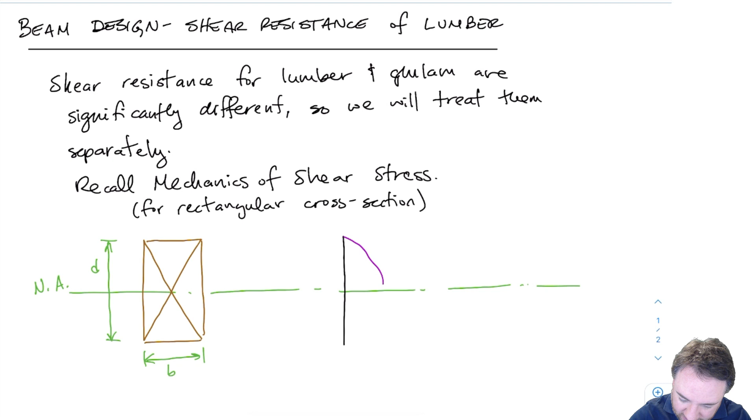Before we go into the standard design equations, let's recall what exactly is happening when we look at shear stress in a beam, and we want to limit the shear stress to be less than the limiting shear stress. If we have a rectangular beam like the one shown here, the shear stress distribution in a rectangular beam should be parabolic.

If I want to find out what this FV is, the shear stress, you'll recall the equation for FV from a previous mechanics course: VQ divided by IB, where V is the shear force at that section, I is the second moment of area or moment of inertia, B is the base or width of the cross-section, and Q is the first moment of area, which looks something like this.

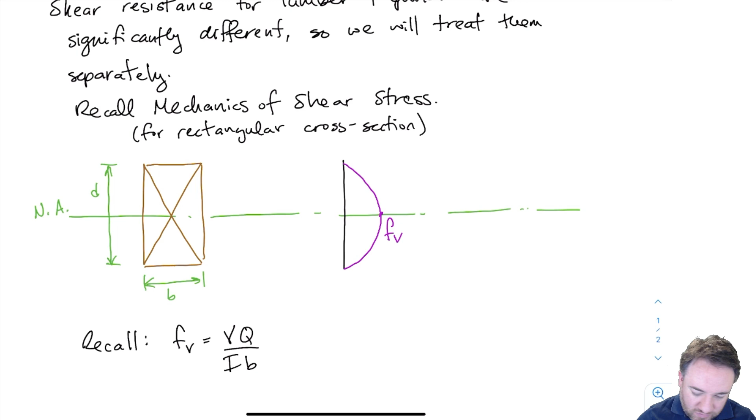Recall the first moment of area: this is how we calculate it at the center of the section. Q changes depending on which part of the cross-section we are with respect to height. We take the area to one side of the neutral axis and multiply it by a lever arm, the distance from the neutral axis to the center of that area.

If I'm looking at the center of the beam, where FV max is, I take the area of the top half of the beam and multiply it by the distance d over 4, the distance between the neutral axis and the centroid. So to calculate Q at the center, A prime, the area, times d over 4. A is B times d over 2, and d over 4 here. So what we get is BD squared over 8 for the center of the section.

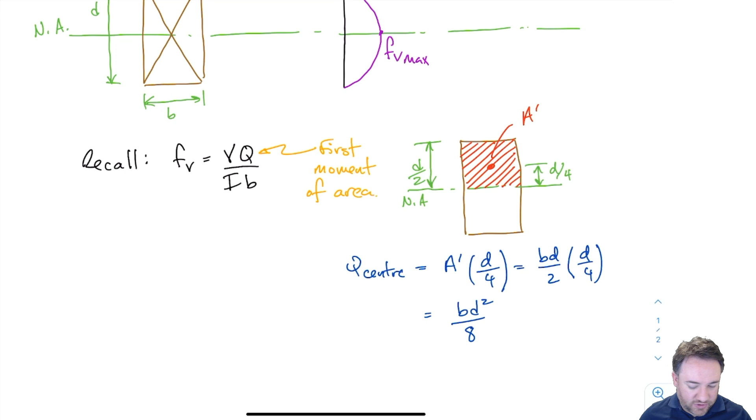This applies only to rectangles, obviously. I forgot to indicate here that this is shear stress.

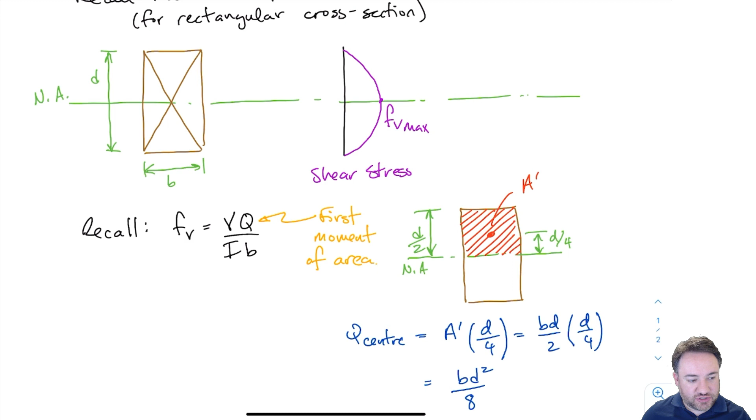Now if I want to sub everything in to find my FV, the actual shear stress at the center of the cross-section where it's maximum, the peak of that parabola, I sub into the FV equation. FV at the center is my shear force times Q, which we just calculated, divided by I, which is BD cubed over 12 for a rectangle, times B. If I sub all that in, I get 3 over 2 times V divided by BD, which is the same as 3 over 2 times V divided by A, the cross-sectional area.

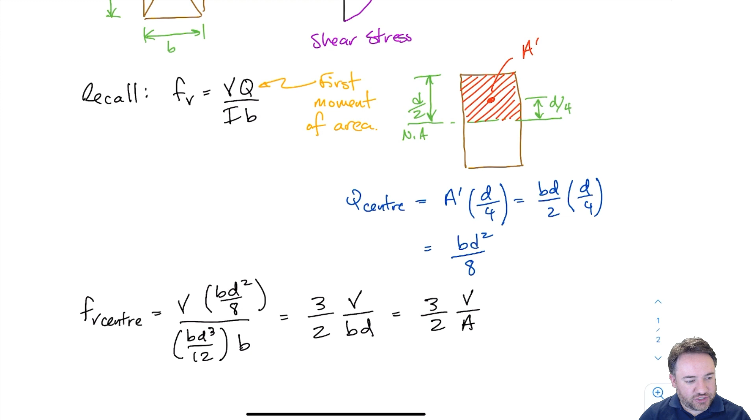So what is V divided by A? If I wanted to find the average shear stress over the height of the cross-section, considering the stress as constant, which it obviously is not, I'd draw something like this as my FV average shear stress over the height. We find that the maximum shear stress is 3/2, so 50% more than the FV average. That's what this factor of 3 over 2 represents: the peak is 50% greater than the average shear stress, if I define average shear stress as V divided by A.

So this F center is also my F max. For a rectangle, FV max is my FV center, the stress at the center height, which equals 3 over 2 times V over A. Now if I rearrange this so that I equate this to resistance...

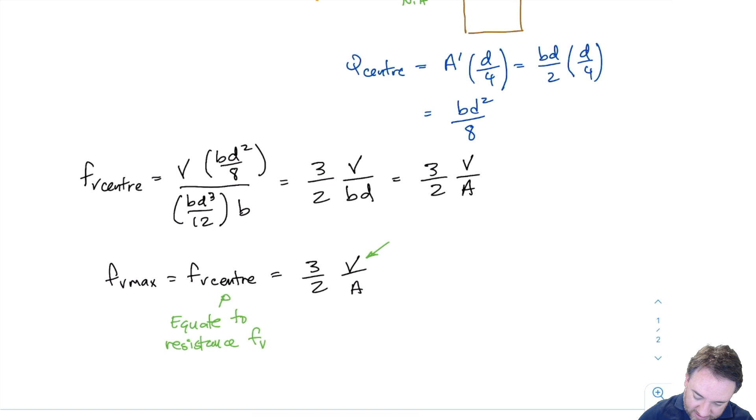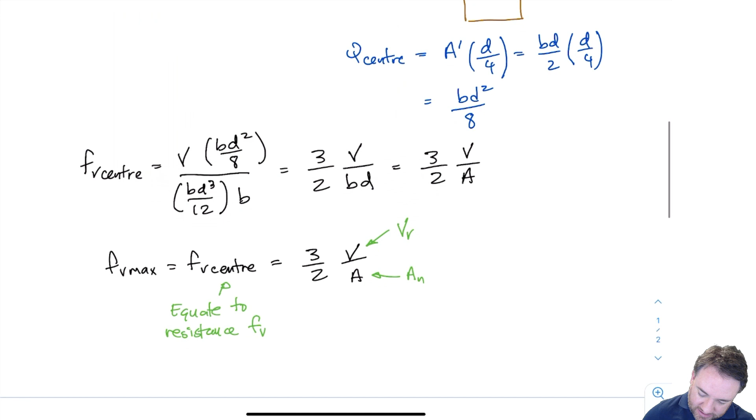Let's say I have an FV, which is a strength, a certain shear strength of X MPa. Then I set my V to be my resistance, since I'm trying to rearrange to find an equation for resistance in terms of force units. My A I set to AN, my net section. When I rearrange, I get VR, my strength in terms of shear: VR equals 2/3 of FV times AN, where FV is my shear strength in terms of stress, and AN is the area of the cross section.

So we can expect that our shear strength equation from the code may potentially look something like this.

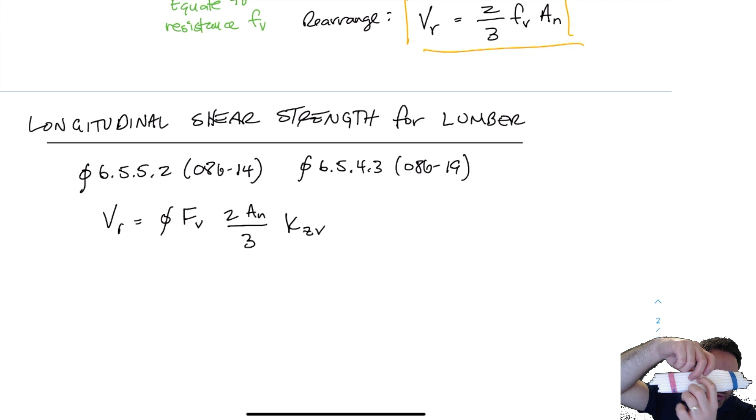And indeed, this is what I get. So I'm talking here about longitudinal shear resistance for lumber. The reason we call that longitudinal shear resistance is because the failure mode for this type of shear in lumber is longitudinal sliding of the fibers. If my straws represent my wood fibers, it's longitudinal sliding of the fibers relative to each other, which means breaking the lignin bond holding them together and shearing one set of fibers relative to an adjacent set.

You can see that the longitudinal shear strength equation, VR, is phi, which is a material reduction factor, times FV, which is my shear strength in MPa, times A, my net area. That factor of 2/3 is built right into the equation, which comes straight out of mechanics. The last parameter, KZV, is just a size effect factor, which we get from the table, and we're used to doing that by now.

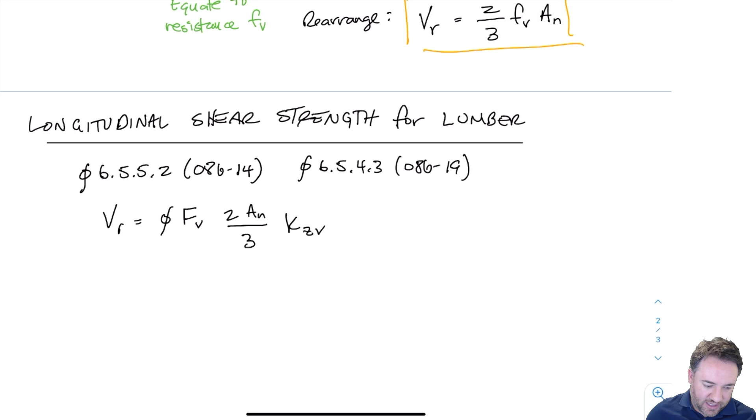So just to fill out the rest of these.

Okay, so phi for this equation is 0.9. Capital FV is our lowercase fv multiplied by all of the modification factors, KD, KH, KSV, KT, which we get from our regular tables, and we get our other factors also from the regular tables that we're used to getting them from.

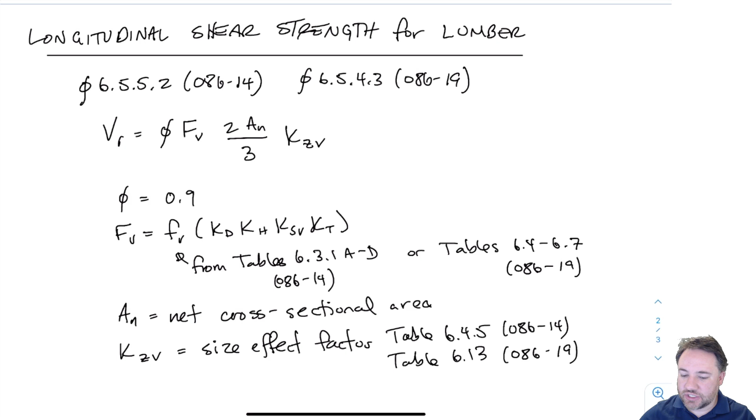AN is our net cross-sectional area, which we have already looked at calculating when talking about tension resistance. And KZV is the size effect factor, which comes from this table, which we have also seen before on the left side here. It's the same as the one that we use for bending.

Okay, so there's one other thing we need to consider here, related to when we discussed compression perpendicular strength. We said that for compression perpendicular strength, we had two cases: one for loads applied near a support, and one for loads which we'll call effectively all applied loads. For loads near a support, we considered those separately, because in that location, defined as being within D of the support, where D is the depth of the member, near the support condition, all the force from the top of the beam was transferred through the beam directly in compression perpendicular, and there was not any significant shear in that region.

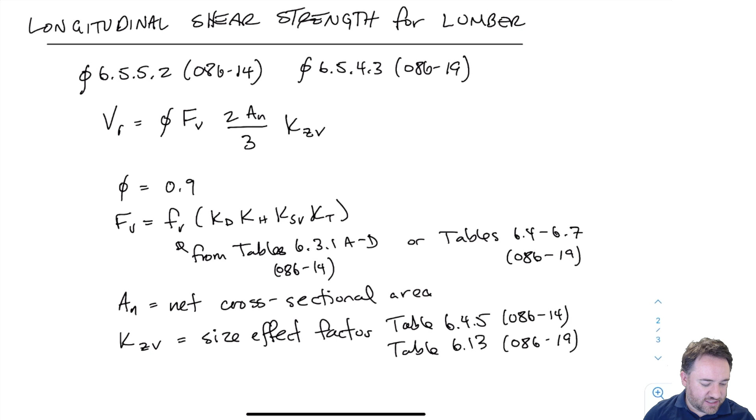That's why we had to treat it separately, because for compression perpendicular, when we had the stress going all the way through the section, we had a larger deflection resulting. So now that we're talking about shear, we have basically the flip side of that: in those regions near the support, we don't have any significant shear going through the beam, and therefore we don't have to consider the shear in that location. We're going to clarify with a drawing.

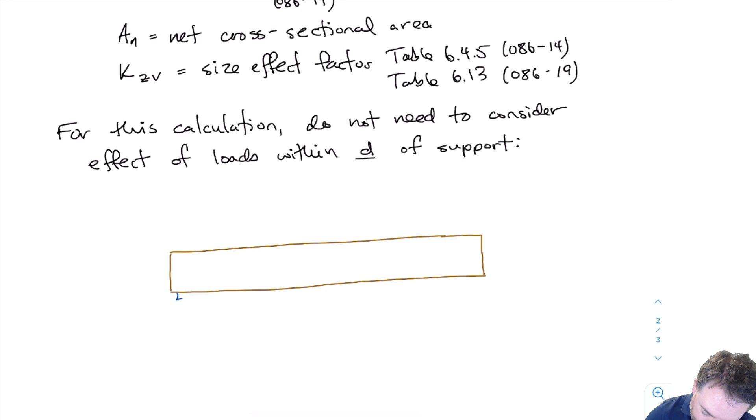Okay, so if we're just looking at a simply supported beam like the one I've drawn here, a timber beam, and let's say I have a uniform load on it—it could be any load here, but we're just talking about a uniform load for now, for this example—and I've drawn the shear diagram below it. We should be very familiar with this shear diagram and how to draw it already. So in the regions that are within D, I'm going to put an identifier here for where we are within D approximately of the support on either side. Just eyeballing this, but it's more or less correct. So now we have these zones that are within D of the support.

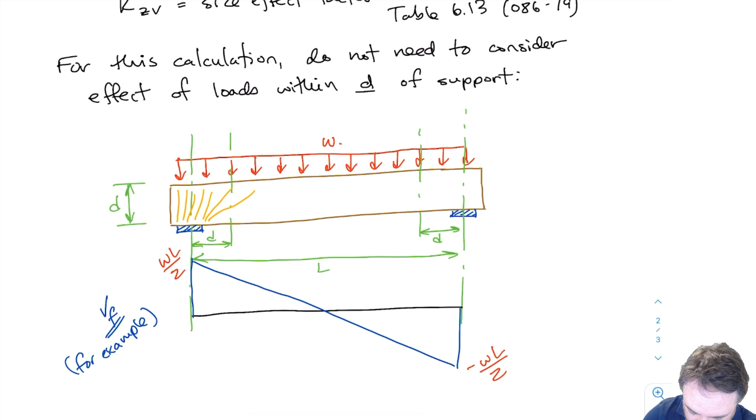And we'll recall that when we were talking about compression stresses being distributed, right over in the area of the support, the stresses are directly going through the member from the top to the bottom, basically direct from top to bottom. That means there's no turning of those forces—there's going to be no significant shear. Whereas as we get towards the center of the member, those loads have to be—the principal compressive stress has to kind of turn and go from being vertical to going on a diagonal before they go back to being vertical again at the location of the support.

So that's what's happening within D. The approximation we're making is that within D, the shear stresses caused by the shear force are not significant. And D is measured from the center of the support, as I've drawn here.

So if those shear stresses caused by the shear force in that region are not important, then instead of considering the shear at this point, which we know is WL/2, I'm going to consider that the applied shear to my beam is this point here, which I'll call VF star. So we will design for this.

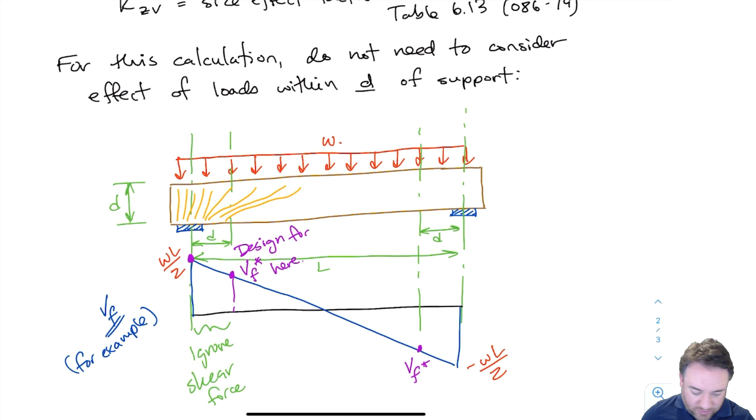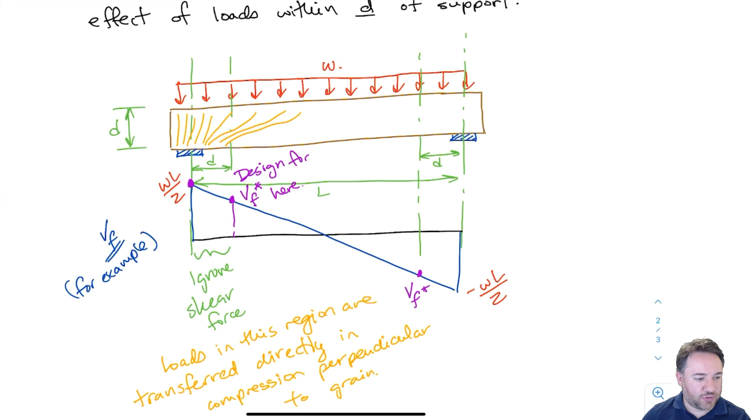...forces are going to be transferred directly in compression perpendicular to grain. So that's what we're allowed to do for this particular longitudinal shear strength calculation. This does not always apply for every case, and as we'll see, we're not permitted to do that when calculating fracture, not shear, which we're going to talk about next. But for lumber beams within D of the support, we can basically ignore the shear forces within D of the support for the purposes of comparing to the shear resistance calculated using that equation.

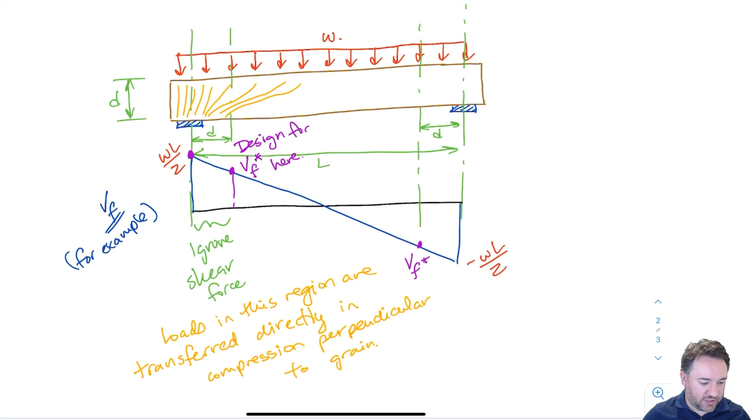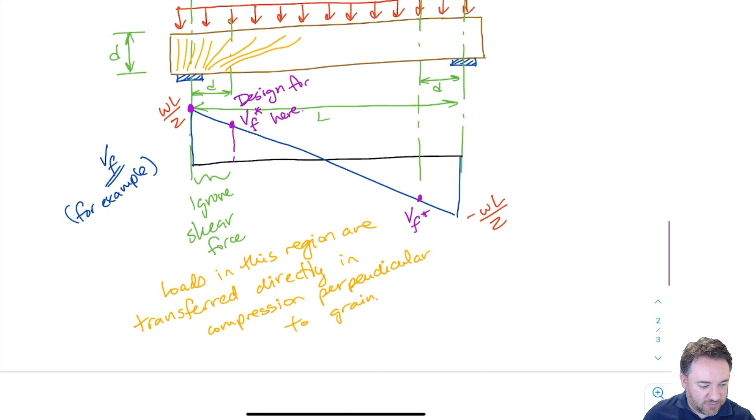So that's not the only type of shear force in timber that we need to worry about. We also need to worry about something called the fracture shear resistance.

This is what notch shear resistance is all about—we call it notch shear or fracture shear resistance at a notch. I'm going to use my straws again to show what I'm talking about, going to a close up for this. Let's say I have my beam like this, with all my straws representing the fibers in the beam. Let's say I have a notch, so I'm going to shift some of these fibers over to represent as if there's a notch here. So now I have a notch—some of the fibers have pushed out of the way. This elastic band again represents the lignin holding all the fibers together.

Now let's say I apply a shear here. Let me make this notch a bit more extreme so it's easier to show. Okay, here's my notch. So now let's say I push here—I have shear being applied down here, just like in my drawing. So there's my drawing that I'm looking at. I have shear applied to the beam, and a support at the notch location.

So now if I push on this, you can see what happens is that I'm basically wanting to separate at that notch location and cause a fracture there. I'm having a stress concentration at this point—this is what's called the reentrant corner, the corner where the notch comes down. At that reentrant corner, I get a stress concentration, and that could form a crack, especially if I have a bad notch geometry.

And we're going to talk about what's good notch geometry and what's bad notch geometry. So I need a way to calculate this condition. This is obviously much worse than if I load here, because here I'm engaging the entire cross section. Here I could get a crack, and that crack can propagate through the entire member. So again, I can have a crack forming here due to a stress concentration at that corner.

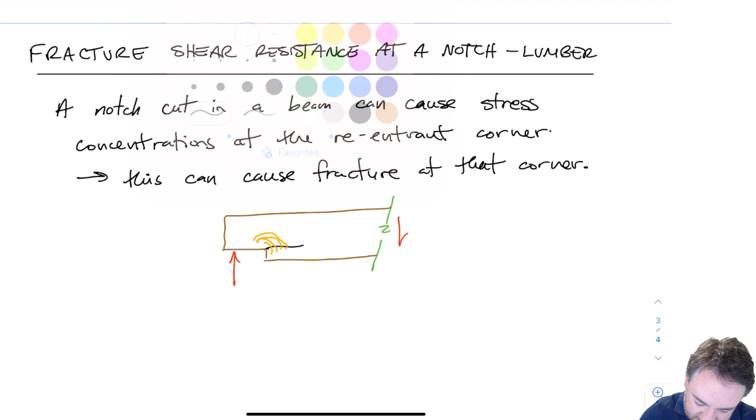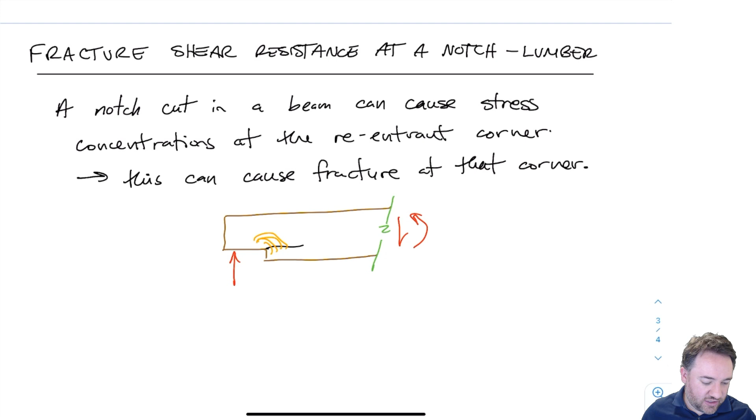And I forgot the moment that's at that section—there's obviously a moment at that cut as well. So one thing I want to do to avoid this problem is to design notches with a better geometry if I can. This doesn't actually come into the equations, and they end up being very similar—the strengths for both of these geometries are going to be identical, but it's still a case of good detailing versus poorer detailing. So, notch geometry.

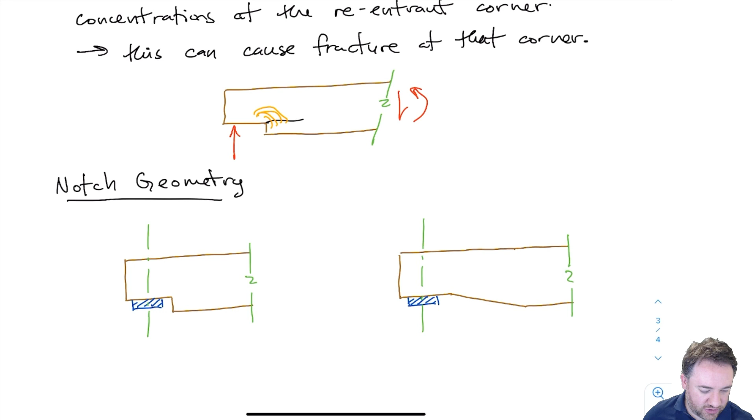Okay, so here I have two different notches. These notches are otherwise functionally identical. The strength in the calculation will be identical, but one is considered a good notch geometry. One is an okay notch geometry. The other one is a better notch geometry.

Here I've identified the location of what we call the reentrant corner. So it's the corner, it's an interior corner where the notch, it's basically the first corner that you run into from the support. That's the reentrant corner. It's the interior corner of the notch. So this is like an exterior corner, right? It's kind of the interior corner part where the cutaway is.

And that is where we're expecting to have that stress concentration. So that stress concentration is going to be worse if I have a sharper corner than if I have a more sloped corner. And that's why the geometry on the right is considered to be better than the geometry on the left. And we need to define some parameters here that we're going to use in our equations.

This is the center of the support. That's where we're going to measure from. And we have two different depths that we are concerned with. One of those is the total depth D. The other one is what's called the notch depth dn. So it's just basically the size of the notch.

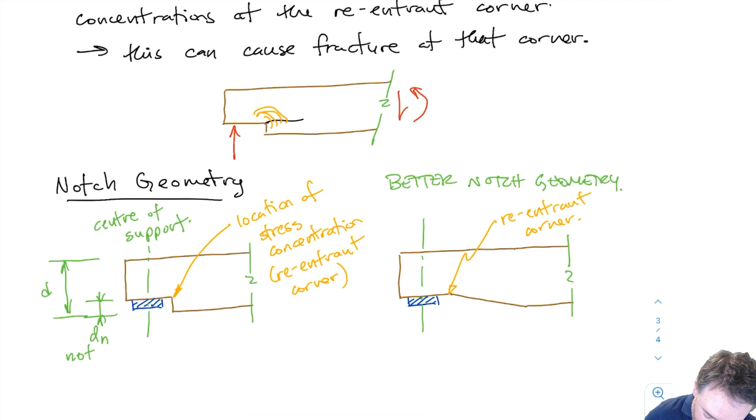And just like when we did calculations for AN, our net area, the notch depth is limited to, at maximum, 25% of the total depth. Okay, so that's a limiter. Over here, we also have a notch depth in the better detail, same restriction of 25%.

And the last one that we need is this parameter here, which is E, which is our notch length. And that is measured for this equation from the center of the support to the first reentrant corner. And this is where it will be on the other side.

Now, if you're looking for what is a good slope here, there is a suggested slope for this type of detail, and that slope would be 1 to 15. Okay, so now we have our E, which we're going to need in our equations. The larger the E, the worse the case is, and we have our notch depth dn, which also the larger the notch, the greater the reduction in strength.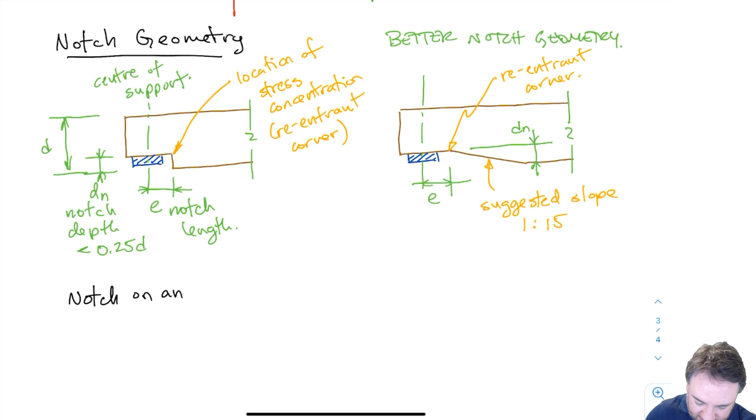There's one more case that we should look at, which is what happens if our notch is on an angle. And what happens basically is we consider our E and our D to be parallel with the main axis of the wood. And that is going to look something like this.

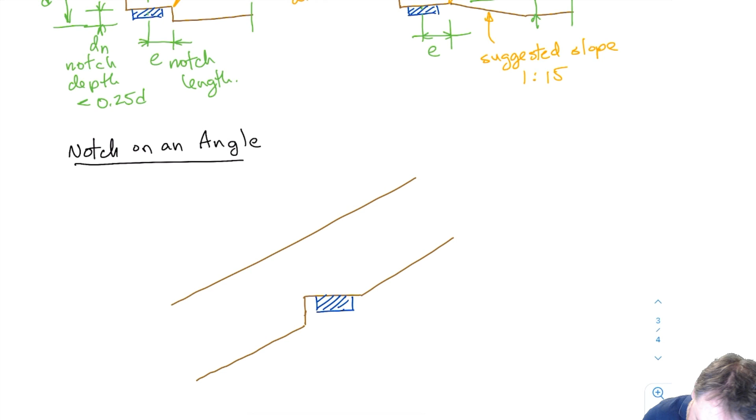Okay, so let's say that I have a member that is at an angle and it's sitting on some support, and there's a notch cut out of the piece of wood so that it can sit directly on the support. So this might be a common case at the end of a rafter or something like that.

Then how do I measure my dn and my E? Well, my dn is going to be the depth of the notch perpendicular to the longitudinal axis of the piece of wood. And the E is going to be from the center of the support to the reentrant corner again in the direction parallel with the piece of wood.

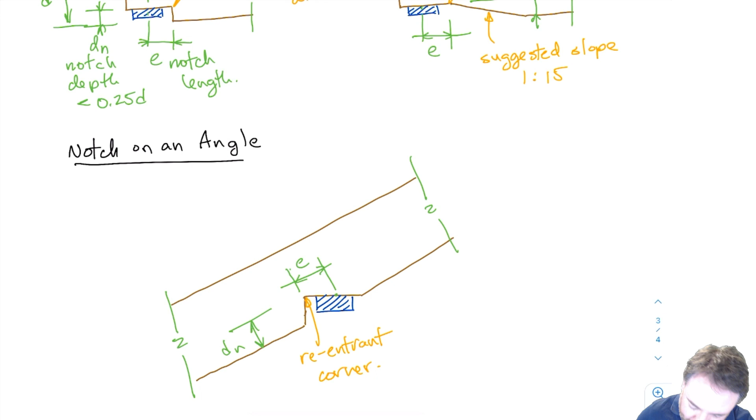I could probably draw that a little bit better to make sure that those lines appear more perpendicular. And you'll find drawings of this as well in the standard. So these dimensions are aligned with the member axis.

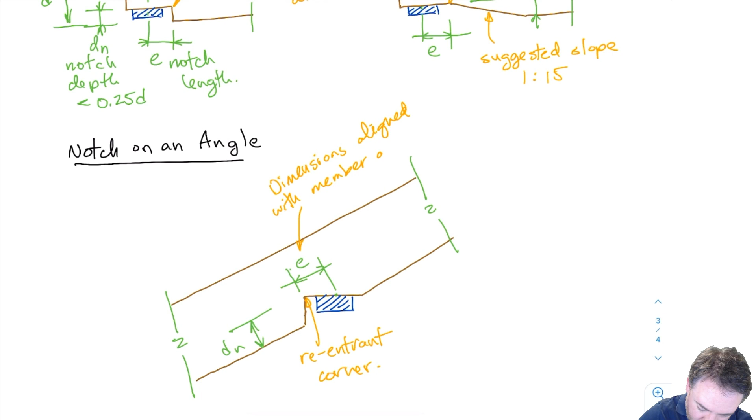Okay, so now how do we calculate our actual notch shear strength? So we have a different equation. This is the equation for fracture shear at a tension side notch for lumber. And basically it's a very simple looking equation, except everything is built into that parameter Kn, which is the notch factor.

So we still have our strength, we still have our modification factor phi, our strength reduction factor phi, we have our FF, which is our notch shear strength, which we'll talk about in a second, and we have our gross area, and then we have our Kn. And we're using our gross area instead of our net area here because all of the geometry of the notch cutout and the reduction of area caused by that cutout is going to be accounted for within Kn.

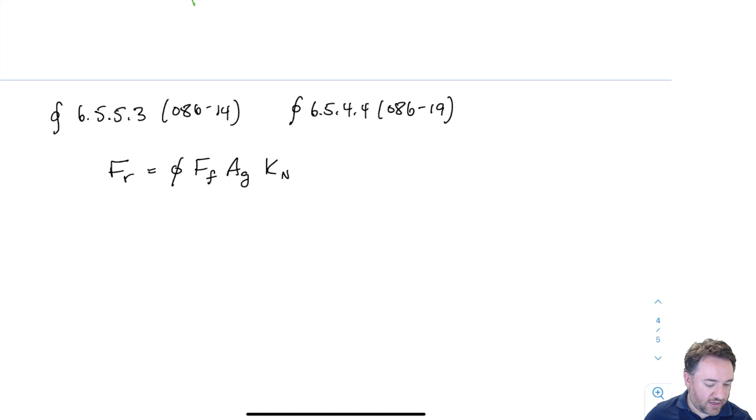I'm just going to finish this out, the parameters.

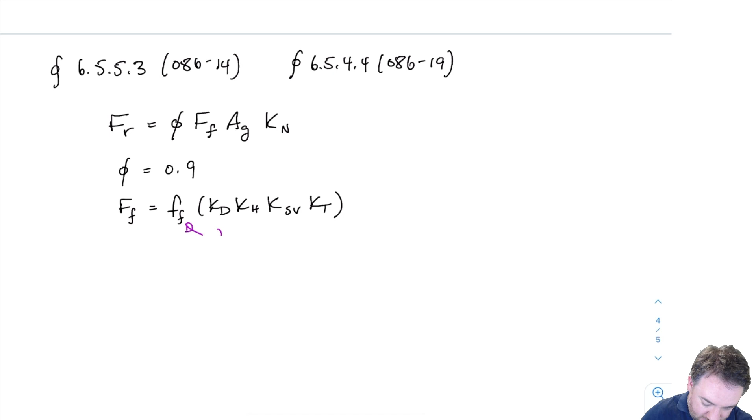So in this case, the notch shear strength, the fracture shear strength FF, is given as a constant that is independent of the type of wood. And you'll notice that it is very, very small—0.5 MPa is very small compared to the other strengths in tables 6.3.1. So that means you get a big penalty for putting a notch, because the strength is very low for notch shear. If you can avoid a notch, it would be best to avoid it.

Gross cross-section area, AG, doesn't account for the cutout, which is going to be accounted for by Kn. Now, Kn is where all of the magic happens for notch shear, and the equation is quite complex, so I'm going to write it out and provide all of the parameters.

Okay, so this is quite a complex equation. There is D in there, which is our depth. There is alpha, which is a parameter we're going to have to define. And there is that one that looks like a funny N, which is eta, which we're also going to define.

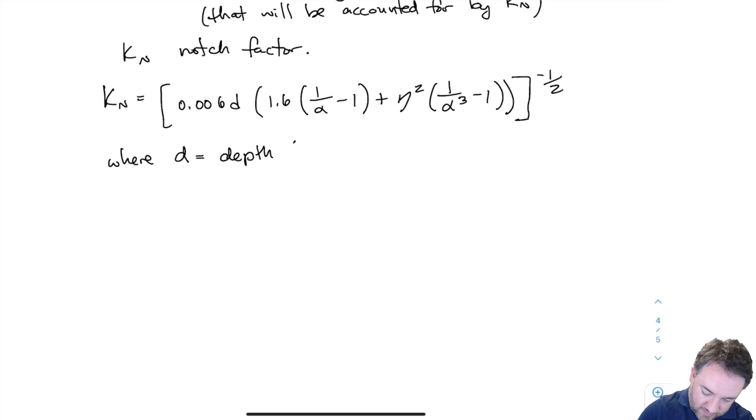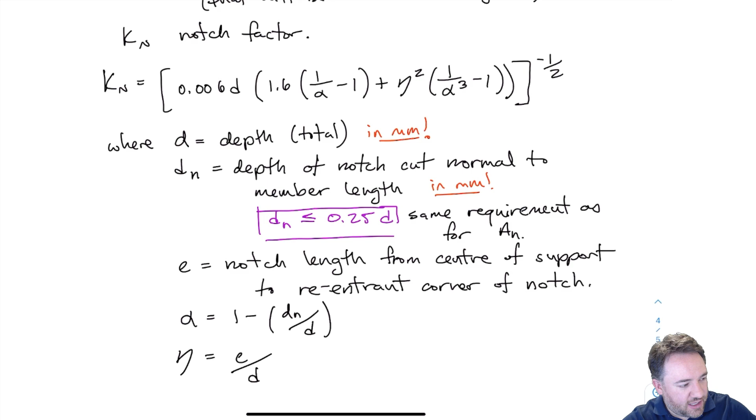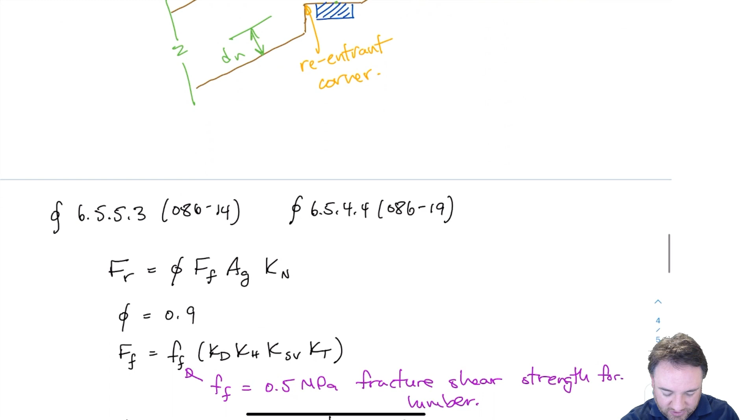Okay, so a lot to unpack here. All of these parameters are provided in millimeters, so you can tell this is kind of a curve fit equation. We have our total depth, our notch depth, and E, our notch length, which we just talked about the geometry of. This defines how we pick E from the center of the support to the reentrant corner of the notch. Then we have these parameters alpha and eta, which basically simplify the look of the equation above.

Alpha is 1 minus basically the percentage of the cross section that is the notch—so it's dn over d, the notch depth divided by the total depth. And eta is E divided by D, the notch length divided by the total depth. So how long is the notch relative to the depth of the beam?

And when I take all of these and sub them all in, then I'm going to get Kn, and Kn is going to be something less than 1, probably to reduce the strength of the notch.

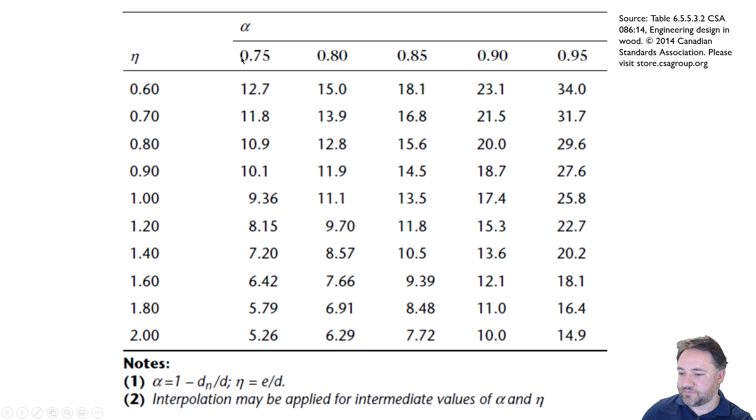Based on those geometry parameters, you'll notice that alpha caps off at 75% because we can't take up more than 25% in the notch. I can pick the value of Kn square root of D.

Then if I want to find Kn, what do I have to do? I basically have to divide this value, whatever I get in the table, by the square root of D, and then I'm going to get my actual value of Kn. That's easy enough, and I can interpolate these values—if I don't have exactly the number here, I can interpolate in between these values to get a value for me to use in the equation.

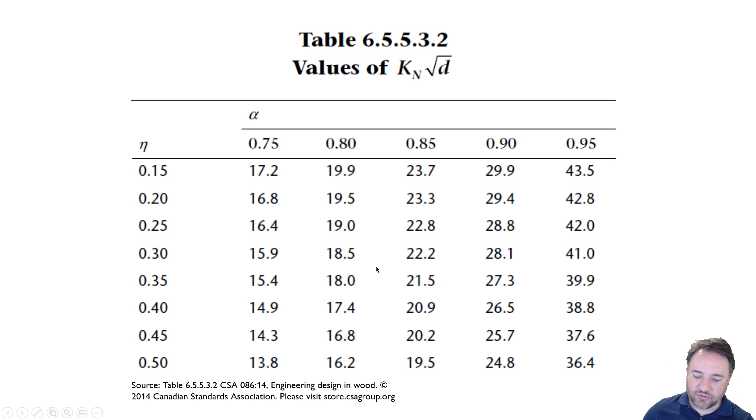Okay, so that's the other way that I can do it.

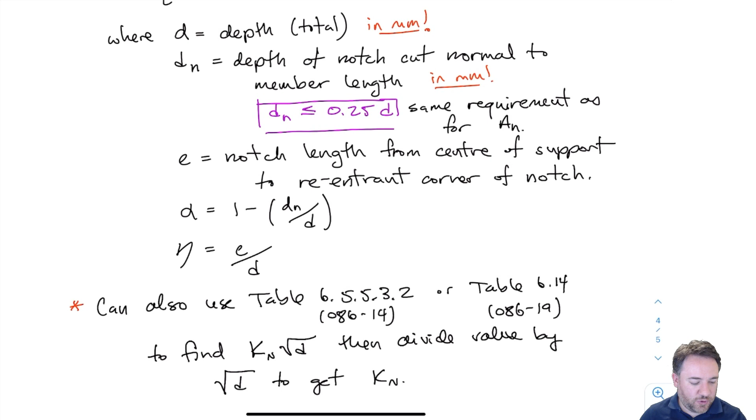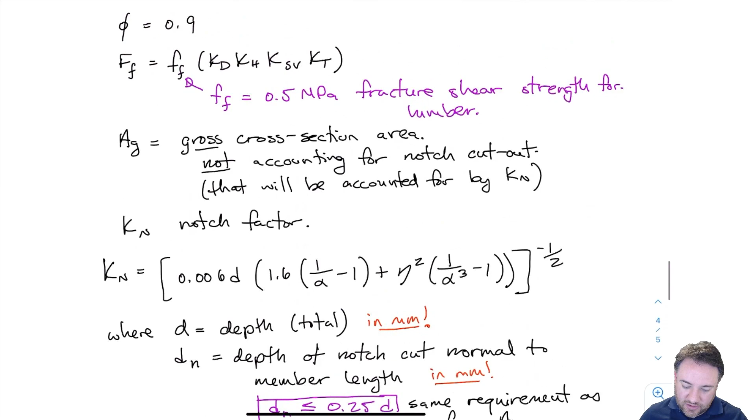Okay, so now when we talked about regular shear, we determined that we did not have to consider the factored shear force within D of the support. That is not the case for this calculation for fracture shear. So for fracture shear, I have to use the VF at the support—instead of using this value over here, I would use this value up here, the full shear strength, the full applied shear value. That's what I'm going to check against my notch shear strength.

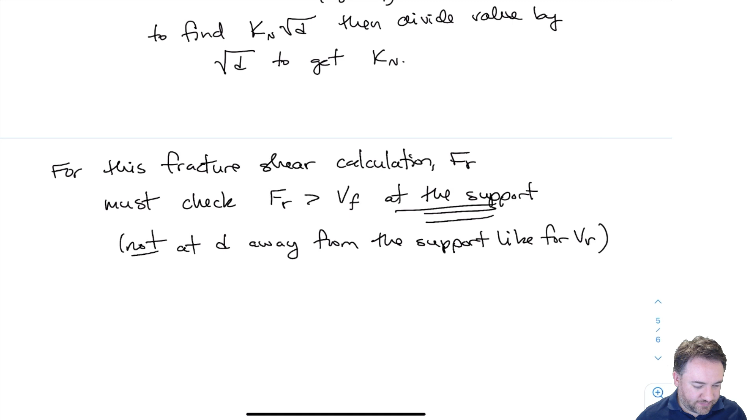I'm just going to make a note of that. So I can only use that shear at D away from the support when I'm comparing to VR, but for this calculation, FR, the fracture shear, I need to use the full strength. Now, there is one additional wrinkle, and this is basically a bonus that I can use to squeeze a little bit more shear strength out of my member, and that is taking into account the required bearing length.

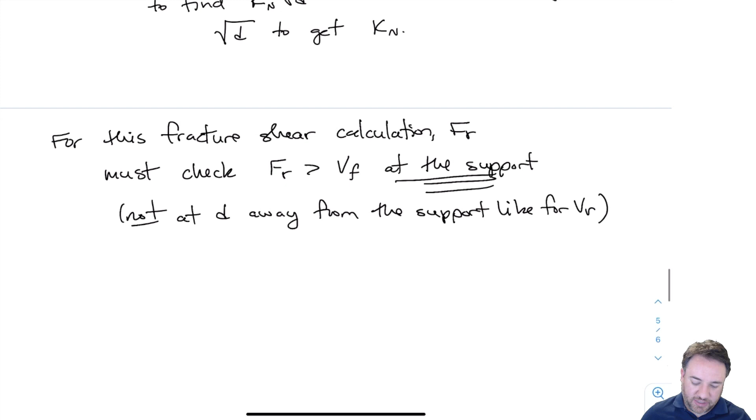There's a part of the clause for notch shear strength that says instead of using the actual full length of the support to calculate E, I could consider what would be the length of the support if I only had to satisfy the actual load there for bearing. What would be the length of support I would absolutely need, and then calculate E on that basis.

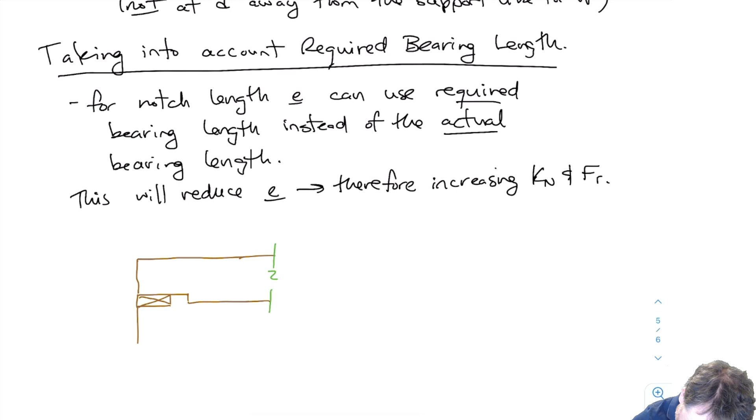This definitely calls for a drawing, so let's recall the way that we usually do this. This is the way we have just been taught to do it previously.

We're trying to calculate E for the purposes of calculating our notch factor Kn, for calculating our notch strength Fr. So we want to calculate E, and remember E was defined as being from the center of bearing to the reentrant corner.

Here I've shown a drawing of what that situation might look like. I have a beam or joist sitting on, for example, a light frame shear wall. My actual bearing length is 140, say it was a 2x6 wall. So I find the center of that wall and calculate my notch length from the center of that wall to the reentrant corner. That's an easy way.

But usually my bearing is going to be longer than it has to be, because it's not usually the bearing strength that's going to govern the design of the beam. The beam might be sitting on a column, and the column has to be a certain size in order for the column to be adequate.

The beam is going to sit on top of the column, but I might not need that entire column's cross-sectional area for the bearing strength of the beam to be satisfied. So probably I don't need that full size of column, but I'll put the beam on top of the entire column anyway. So I have cases where the bearing length is much longer than it has to be, not because it's poor design, but because other requirements determined the size of that bearing surface.

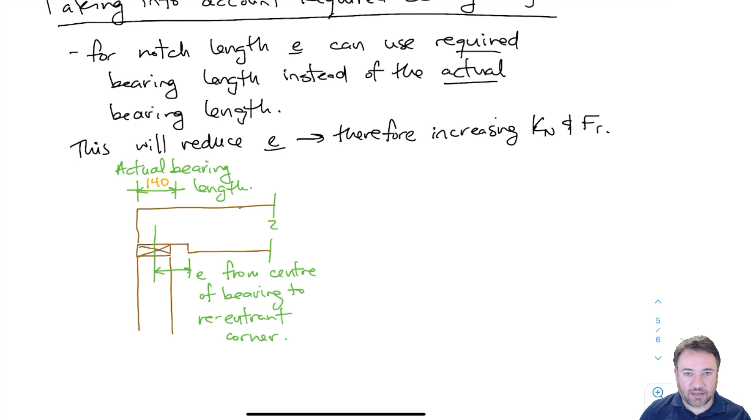Recall that this is the bearing strength for effectively all applied loads - this is the bearing strength calculation. If I do this calculation to find QR, I'll probably find that QR is much higher than the QF being applied at that location. What is the maximum load at the bearing surface, QF? Usually my QR might be way greater than I need.

So instead I can reverse this equation and say this is what the load actually is, QF, and find what the area of bearing surface would be that I actually require in order to resist the beam.

If I go through that process and come up with a required bearing area to satisfy the actual load, this area will be smaller than the actual bearing area I'm using, because I'm using it due to geometric considerations. I can figure out a required bearing length, LB required, which is just my bearing area divided by the width of the bearing surface.

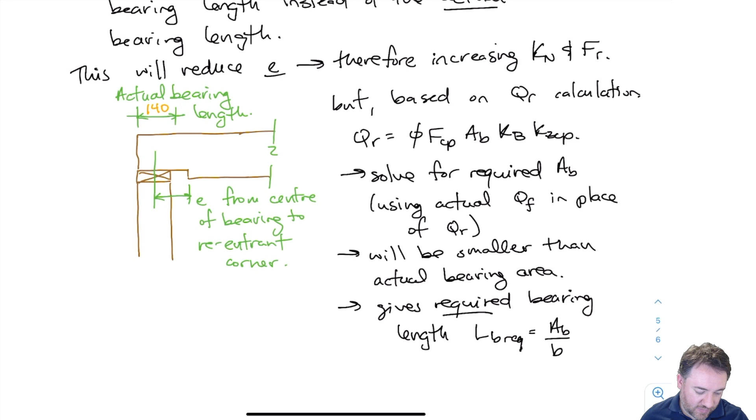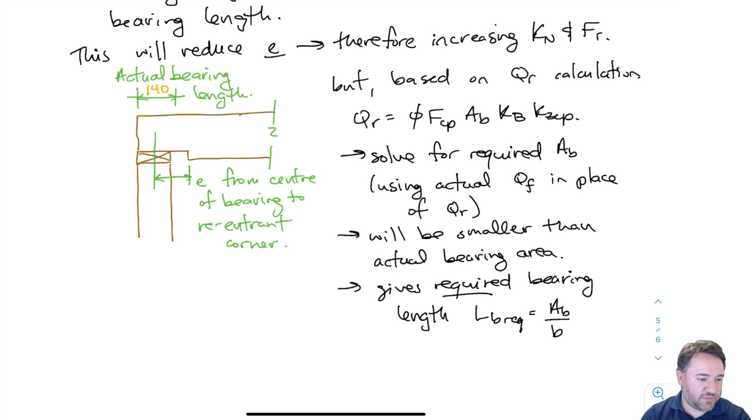So what the standard says is that I can use that actual required bearing length and consider that the entire beam is sitting on that bearing length, which means I'm able to reduce my E. That looks something like this.

This is my same situation blown up a little bit. Let's say I determine that my required bearing length is something like this, based on that calculation using QF and QR.

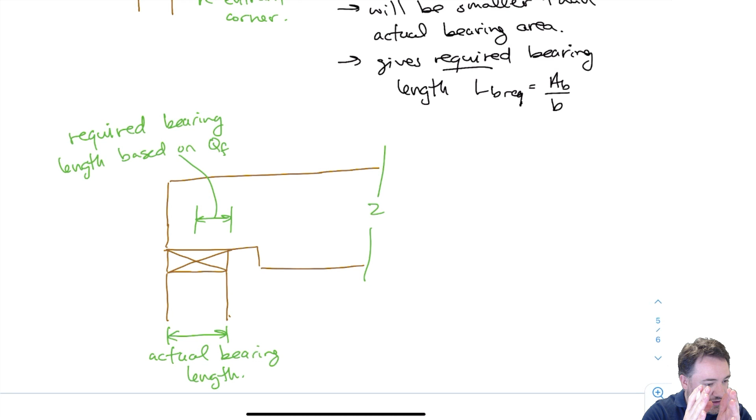To get the best result, I'm going to shove that entire bearing surface right up against the near end of the beam, towards the loading surface of the beam. So this is my actual bearing area - well, the crosshatch isn't the area itself, the area is on the flat, but that represents the part of my bearing surface that is actually required to support the load of that beam.

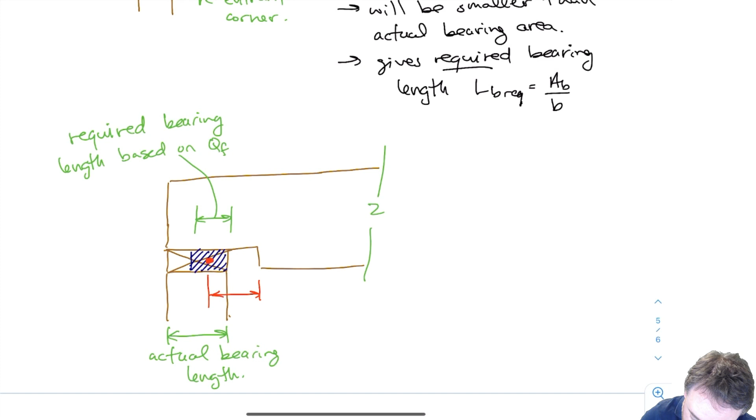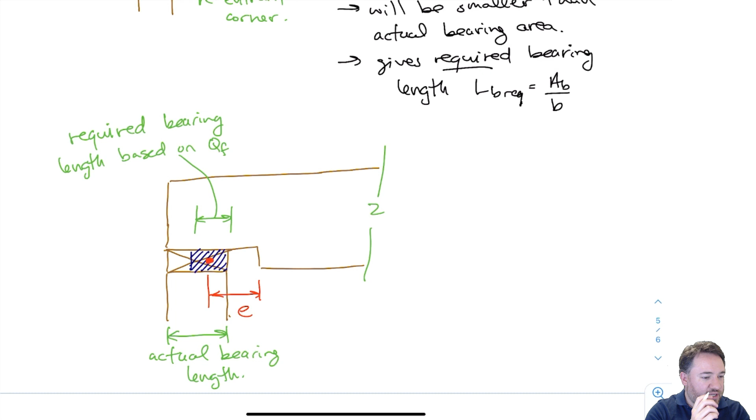Then I can find the middle of that bearing surface and calculate E based on that instead of going from the center of the actual support. You can see how now that I've bunched things up towards that side with a shorter bearing surface, my E is also going to decrease relative to the earlier case where we looked at the center of the full bearing to the reentrant corner. So this is my E required.

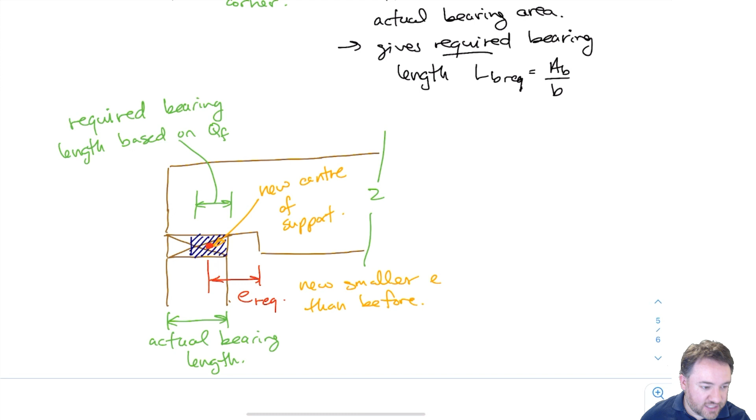So this is a new smaller E, and this here is my new center of support. So this has allowed me to increase my shear strength. This is a trick that I can use to increase my shear strength.

If I do my initial calculation using the center of the actual bearing length and find that it's fine, then I'd have no reason to go through the trouble of calculating my actual required bearing length, a new E, a new KN, and a new FR. But for cases where I might be on the edge, or trying to squeeze more strength out of my member, especially because I've had to cut a notch which reduces my strength a lot, this is a trick I can use to increase the strength.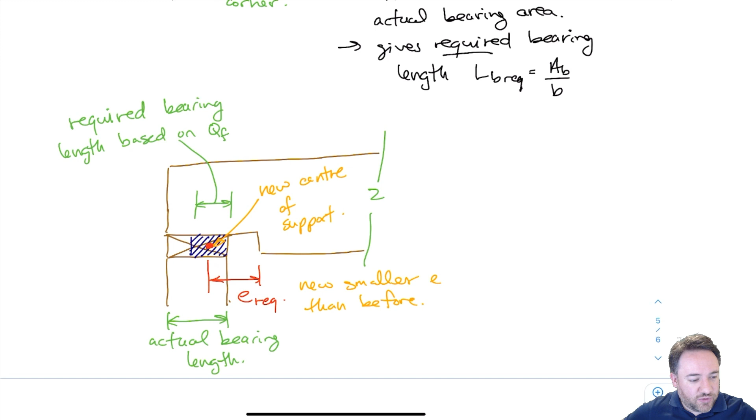Okay, so now we've gone over longitudinal shear strength for lumber. We've gone through notch shear, fracture notch strength, fracture shear strength for lumber. And now I just want to sum everything up because there's a few things we have to consider.

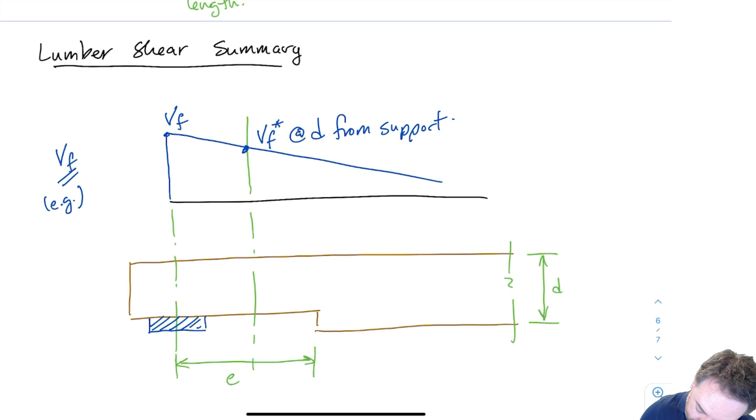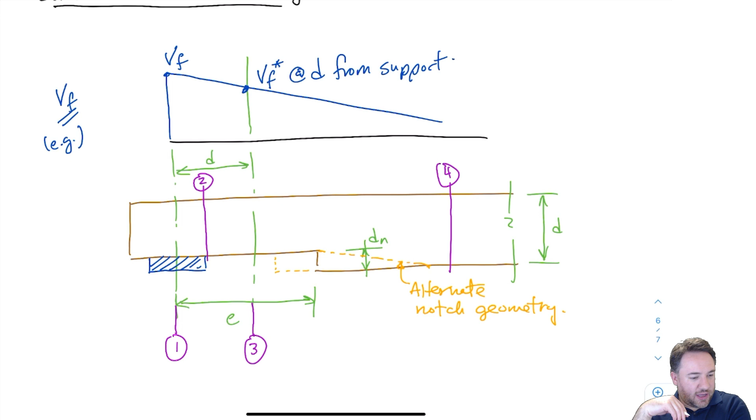I've drawn out a summary of all the different conditions I have for shear in lumber. At the top is an example of a shear force diagram going from VF, my total shear at the support, to VF star, the total shear at a location D from the support. I've identified sections 1, 2, 3, and 4 — 1 being at the center of the support, 2 being at the interior face of the support, 3 being at D from the support, and 4 being at some location where I have my gross area instead of my net area.

So I'll identify that location 4 is where I have my gross area, and location 2 is the location at the face of the support where I have my net area for design.

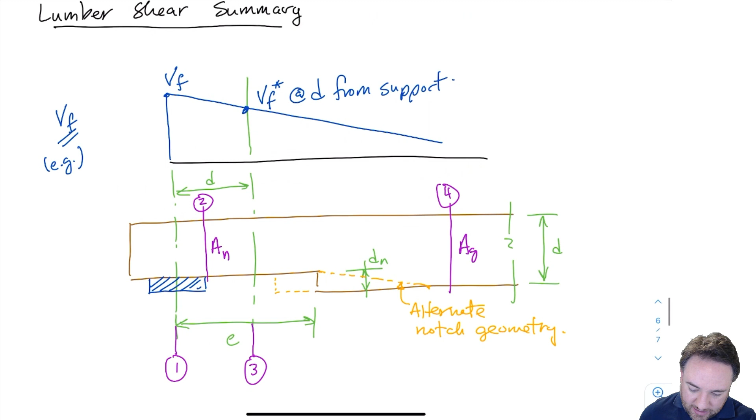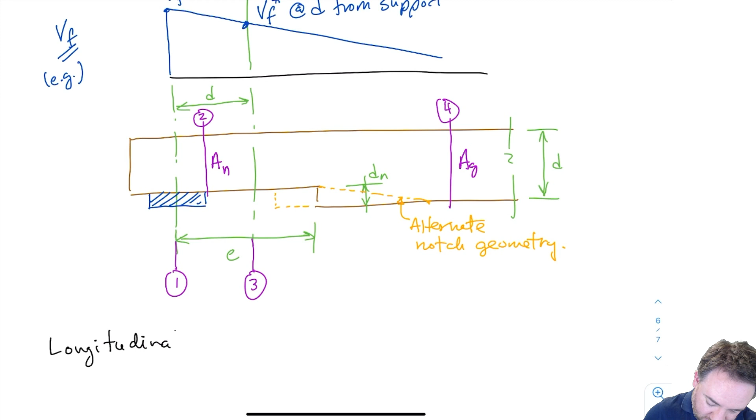When I am doing my design, I have two things to consider: one is my longitudinal shear VR, and I have my fracture shear FR. I'm just going to briefly summarize what I do for each of these as a guide.

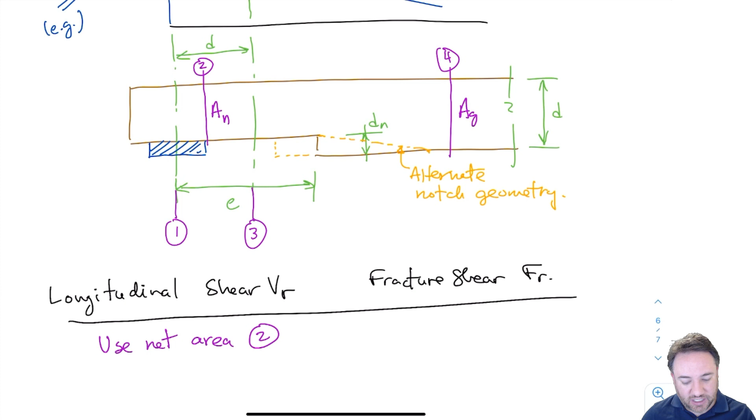For longitudinal shear, we are going to use the net area, which is at section 2, when doing it for lumber. We'll find that when we do it for glulam, we don't use net area, we actually use gross area. And I'm going to check VR, my total longitudinal shear strength, against VF at D from the support.

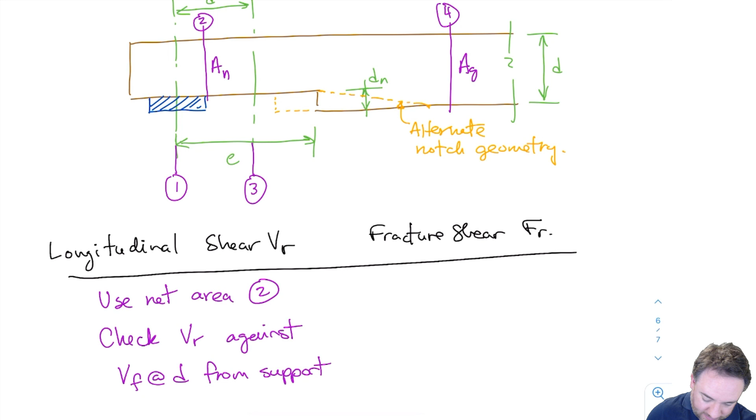So that's VF star shown at location 3. I'm going to use the net area at 2, and I'm going to use this shear at D from the support. Those are the two parameters I'm going to use for doing a regular longitudinal shear strength check for a lumber beam.

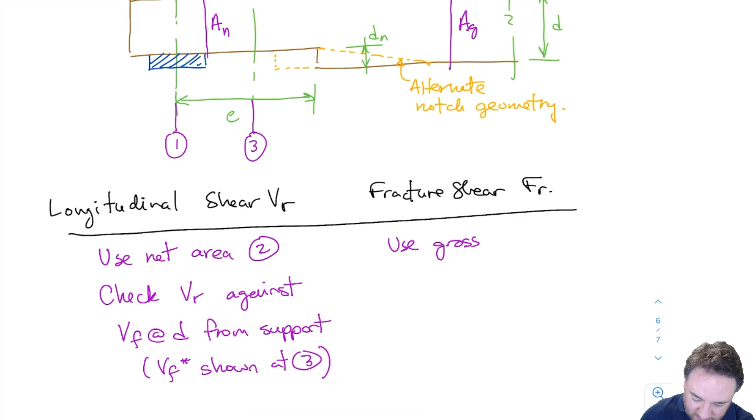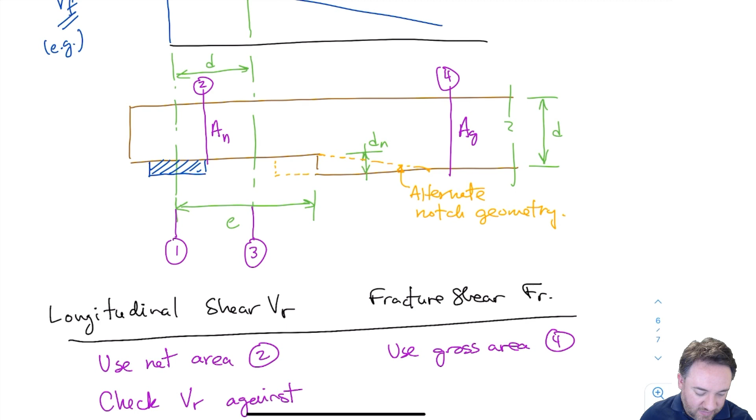Now for fracture shear, I'm going to use the gross area, at location 4 — wherever all my notches are finished and cut out. So at that location 4, that's my gross area. And why? Because KN is going to take into account the notch geometry.

And I'm going to check this FR, the fracture shear strength, against QF. Sometimes that's also the same as VF at the support. QF is not always the same as VF, right? Because VF is the shear, QF is actually the load being applied at that location.

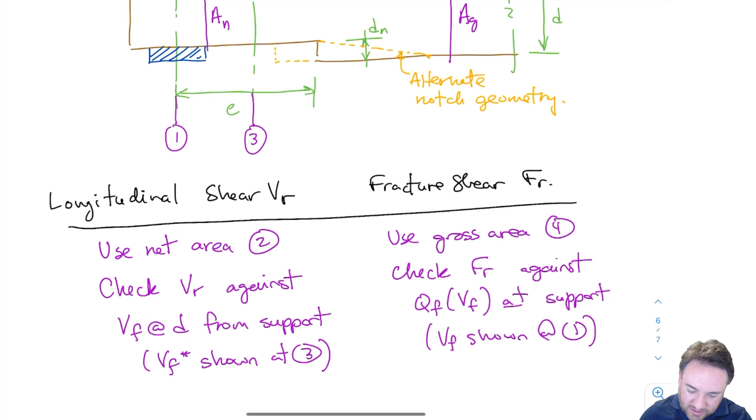But actually I'm going to use the shear value when I do my check, which is VF shown at 1. So I'm going to use the VF that's at the center of the support, this one right here.

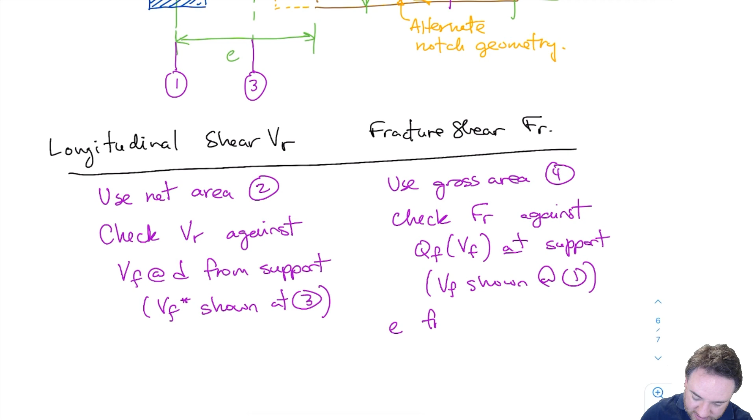And I'm going to calculate E, my notch length, in one of two ways. So I'm going to check E using the equation for Kn either from the actual bearing, the center of the actual bearing, or from the center of a required bearing length, which I can calculate using the QR equation.

All right, so that's basically it. Those are all the things you need to do to calculate shear resistance. If you don't have a notch, then you don't have to calculate fracture shear, obviously. All you're going to calculate is the longitudinal shear, using net area and VF at D. In the next video, we're going to look at the quite different shear calculation methods for glulam.